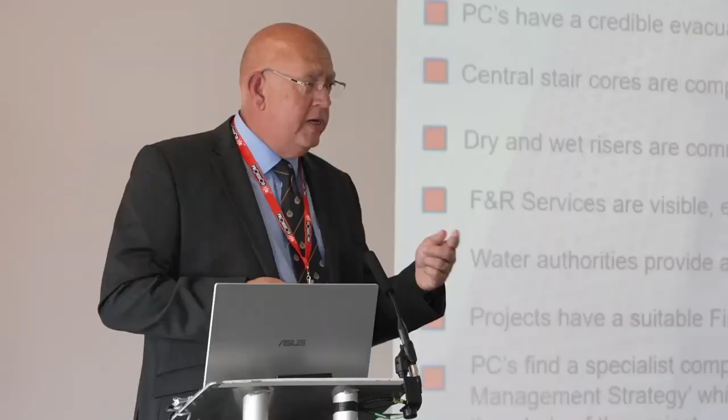We're 30 stories worth of fire hose, seems like a lot, doesn't it? Anybody wants to talk to Tom about what that looks like, the fire stopping elements we're putting in buildings. That's another sort of energy sustainable technology that sort of is great but works against us. It also burns the grass in my yard.

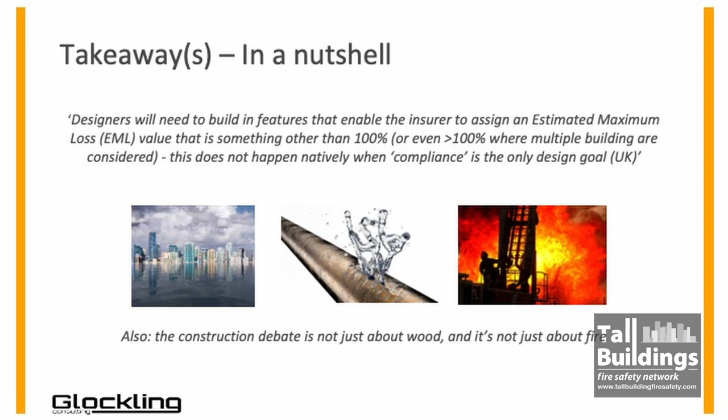Now, the key takeaway up front is that insurers use a term called EML, estimated maximum loss, and you need to know what that is and why it's important. But the other thing is that the problems of insurability are not just about the materials used. They're not just about fire, and they're not just about water. Many other things come into play. So I'll describe a little bit about this term EML, estimated maximum loss.

If every building was insured as though it was going to burn down entirely, it would be very expensive, and I'm sure insurance provision would be very difficult and punitively costly. So here we have a 17-story building. Let's assume we have a fire on one floor. Under insurance terms, the EML, we may assume we lose the fire floor to fire damage. We may crudely assume that 2 floors above might be damaged by smoke contamination. And we might assume that a floor below is subject to water damage from the firefighting activities.

So in this case, the building might be insured on the basis of an EML of 4 in 17 floors. So there's no assumption that the whole building's going to burn down. But let's have a think on what merits the building needs to produce for you to be able to hang your hat on that and stake your money on it. Actually quite a lot goes into it.

Internal fire spread has always been the domain of significant concrete floors. And now, of course, we're deviating from that. In this model, it infers that there is no external fire spread up the cladding system.

And of course, that's the domain of non-combustible systems. And you can go on and on. But an awful lot goes into that simple assumption. So what happens when things come into play that deviate from this model and start to make things difficult?

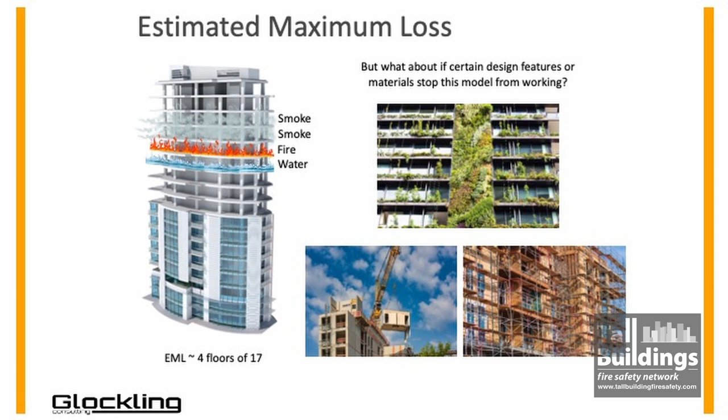Modular construction, or combustible modular construction. With every module lowered into place, there are cavities around it, voids, which have the potential to spread fire out of the domain of any suppression system, so heavily dependent on fire stopping, and obviously out of domain of the fire service as well, who are ill-equipped, understandably, to deal with fires in these hidden and dangerous locations.

And we also need to consider the periods of insurance and construction, a key one where in many construction methods, the fire-resisting surfaces, both internally and externally, are the last surfaces to be applied to the building. So here we have a period of heightened risk at the time of construction.

Now, in putting together the white paper, I wanted to find some of the limits of insurer comfort to do with buildings. And this is what I'm saying. It's not just about what you build out of. It's about a great deal more than that. And actually, we ended up with a matrix of 26 insurability features that are really as few as you can get away with to consider whether it constitutes a desirable building or not.

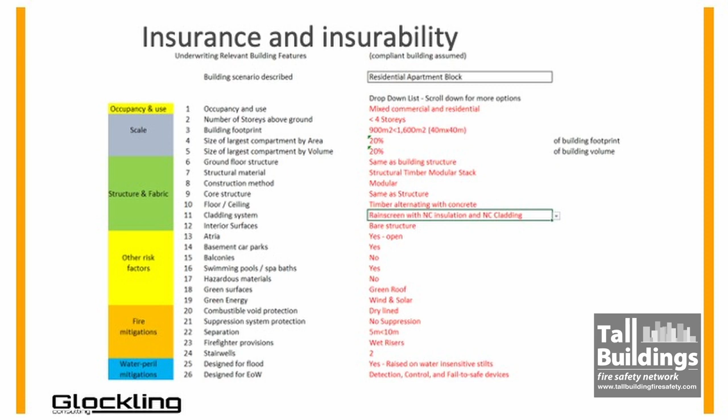So roughly split into six categories: occupation and use, pretty obviously; scale, that's a very, very large factor. The insurer appetite for large buildings versus a single occupancy can be very different because obviously that limits the ultimate scale of loss that can happen. Crucially, the fabric and the structure of the building. What materials are used? Where are they? Have they been intelligently applied? Are you using best-in-class materials where they need to be to curtail the risks at that location?

Then there are other risk factors. Now, obviously, given the audience, this might be unpopular to cite, but if you go back to maybe the Factory Mutual publication on looking at sustainability, they said any pursuit of sustainability inevitably increases risk. There's no free lunch here.

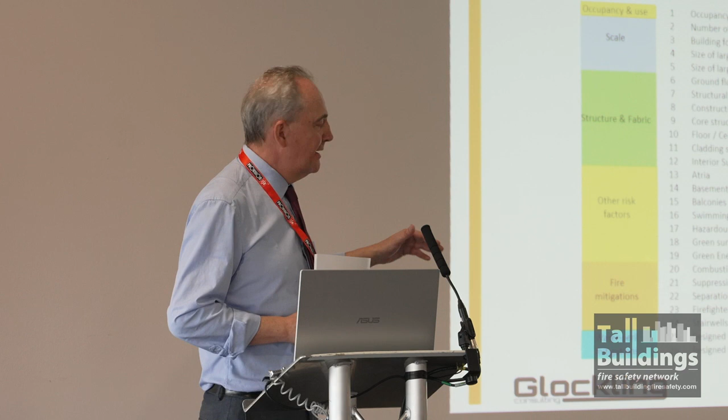And so whilst on the one side you can talk about the benefits of PV panels, wind turbines, green surfaces, they come with their own challenges, and these need to be addressed. Otherwise, it represents a big deviation from where we are. And I'd included with that things like atria, which, whilst they produce lovely spaces, an insurer may view as a breakdown of internal compartmentation, if not correctly designed.

And the two final criteria we have are the effort put in to mitigate fire, and increasingly the effort put in to mitigate water perils. Now, for many insurers, the perils to do with water in large, tall, mass timber buildings represent a greater challenge than fire. The reason for that is that fires are rare events and obviously very costly when they happen, especially if they're not controlled properly. But escape of water events happen in their thousands every single day.

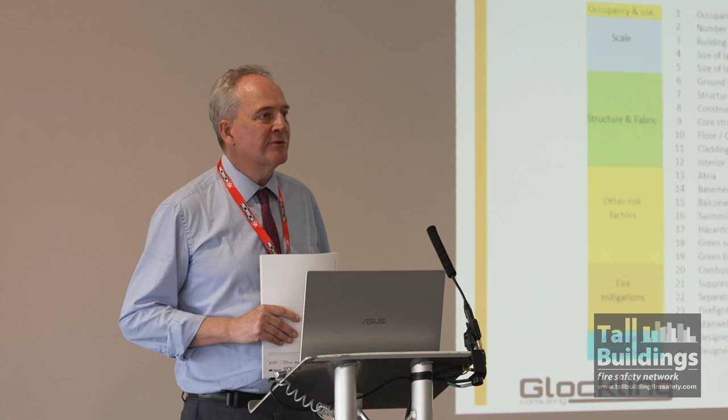Let's not forget, when you change from materials like bricks and mortar and concrete and steel, not only are they resistant to fire, they're also very resistant to water. And if you start to exchange those for materials which are more susceptible, such as timber, then that can change that. Now, in the domestic and residential environment, escape of water losses accounted for more than fire and security combined, coming on for £2 billion a year of insurance payouts. So I think you can see where the problem comes.

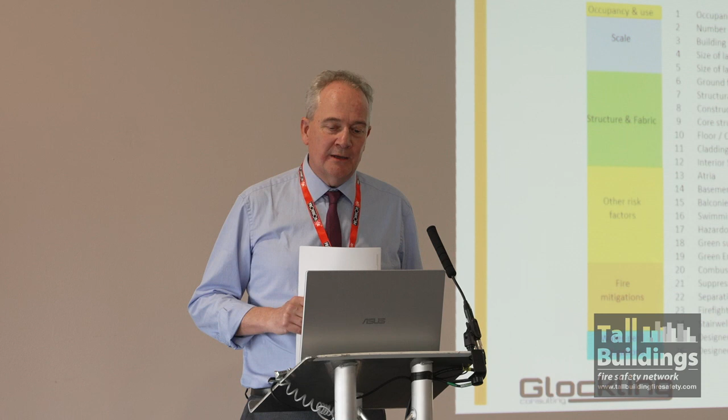And that's where we are building in quite resilient materials. Imagine now a future where we've changed to more susceptible materials and we're building at height, where any escape of water can be amplified down through the floors. And I think you can see that statistic is only going to go one way. So where does this leave us at the moment?

Now, in the UK, the provision of insurance for mass timber is incredibly difficult, to the point where many projects proposed in timber go back to the drawing board and get redesigned in concrete and steel. And it's not ideal. Insurers do not like turning down insurance propositions, but they're not stupid either. And they do need things which have half a chance of working out for them and their investors also.

So while this situation prevails, where there might be a lack of trust in a method, it leads to a lack of availability of insurance capacity. And under this situation, the insurance brokers need to work very hard.

Remember, insurance isn't a right. Insurers can place their capacity in lots of different places to seek the best returns for the least risk. But at the moment, mass timber can be a very unattractive proposition. So that leaves the broker to really scrape around 5% here, 10% there from a range of insurers. And even then, they might be reinsuring back to the reinsurers, so less sticks to them still. It's a very difficult situation, and it ends up being costly.

And as we said before, it can lead to people changing their design basic principles. If you compare that to when there's good trust and technical understanding, then there's a choice of insurers willing to provide 100% capacity, and that leads to healthy competition and low prices, and very much less reinsurance on this basis. So this is where we are at the moment.

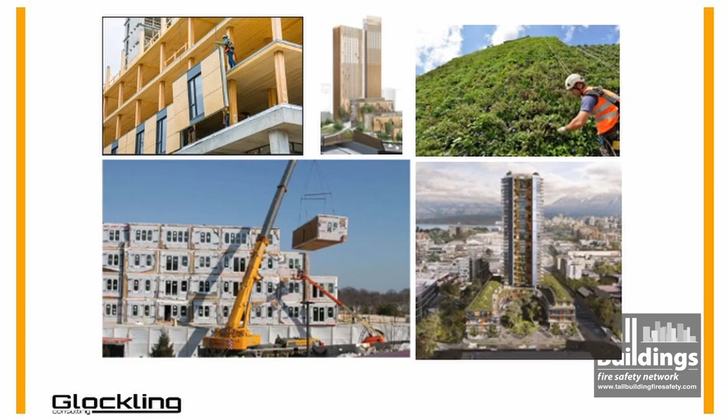But the principles of insurance can't change because they're pretty hard and fast. And they need to be totally agnostic about the benefits to the environment, because we're talking just about risk control and dealing with what we're presented with, not about the necessary stuff to, sort of, save the planet, if you like.

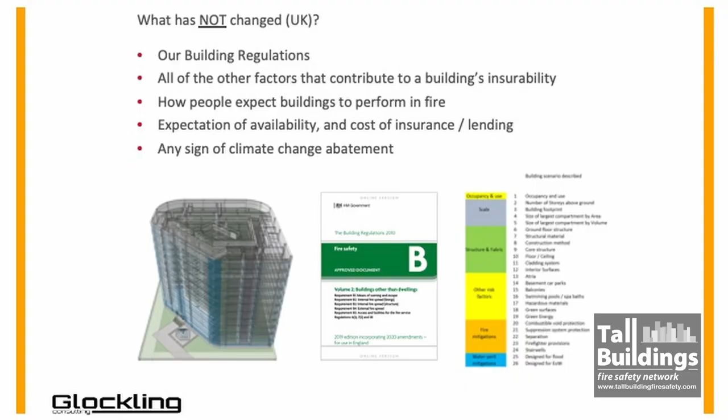But let's have a look at what really hasn't changed. The building regulations in the UK haven't really responded to the challenge set. Now, that's a very big issue for us, because we know if it's in regulation, then generally it gets done. Actually, I think we've seen from Grenfell that even when it's required by regulation, often it doesn't get done. But that's a different story.

So our regulations in the UK are about life safety. And if you want to put it very simply, that's about evacuation before collapse. After evacuation, there's very little interest in what happens to the building, but clearly there's a group of people, such as the owner of the building, the occupants of the building, and the insurer, who really want something to save afterwards and to put back to right. Not every building fire should end with the possibility of it being on the ground.

And when you compare, say, to the United States, they have addressed this in the International Building Code. So one of the key things which we'll highlight, obviously, is combustible voids. It's clearly a key area of concern. But in the International Building Code in the States, it will say if you have a combustible void, it will be filled with mineral fibre, or it will be lined with gypsum board, or it will be sprinkler protected. So in essence, by regulation, they've said that there's no such thing as a combustible void, which makes everything an awful lot easier.

And actually, when querying insurers about the palatability of different types of building using those 26 metrics, the American insurers were a lot more laid back, because they know if it's built in the States, it will be lined with gypsum board, there will be no bare wood surfaces, it will be sprinkler protected, so by and large they can treat it as a pretty ordinary building from that respect. But it's not the case for the UK.

So the other thing that hasn't changed is all the other factors that contribute to insurability. How people expect buildings to perform in fire. That's a very interesting point. Our experience of how buildings perform in fire is built out of the use of materials which perform well in fire, but were the means to achieving the life safety objective.

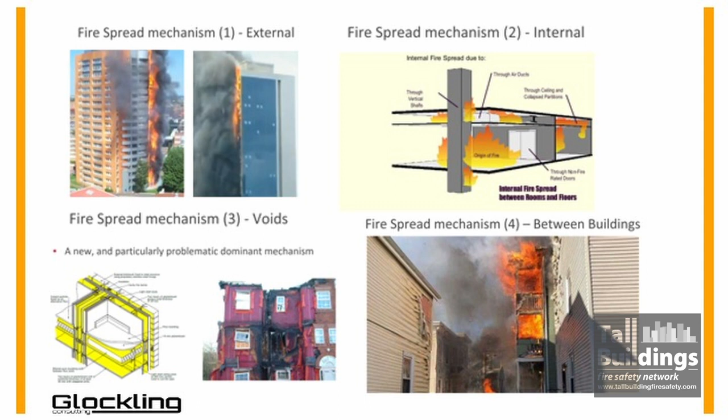So the key forms of fire spread, which are really tackled in this document and really need to be addressed at the point of design if you want to impress those who have a higher interest in the building really performing at a property protection level. Obviously external fire spread and the use of good cladding to prevent that. Prevention of fire spread through the internal occupied spaces, and our building regulations do this very well.

Now, nothing I'm saying here is a criticism of our building regulations in terms of their ability to preserve life. They do that very well, and the statistics for the UK are exemplary in comparison to other countries. But the internal fire spread is the story of really fire doors, ducts, dampers, and the like. But what we are seeing a lot more of at the moment is the introduction of voids.

So here in the bottom left-hand side there, really just as a fisherman's net could be thought of as a lot of holes sewn together with thread, really wall makeups now are becoming so lightweight. They are really a loose connection of voids connected with lightweight materials. And that makes things very problematic, and it makes designs immensely dependent on really CAD-level accuracy installation of fire stopping. And in there we see a massive challenge, particularly for the lighter weight construction methods such as light timber frame.

Of course, we also need to consider fire spread between buildings also, because it's not uncommon for EMLs, estimated maximum losses for a building, to be assigned that are over 100% if there's a fear that fire may spread to involve other buildings also. And that can be immensely problematic as well.

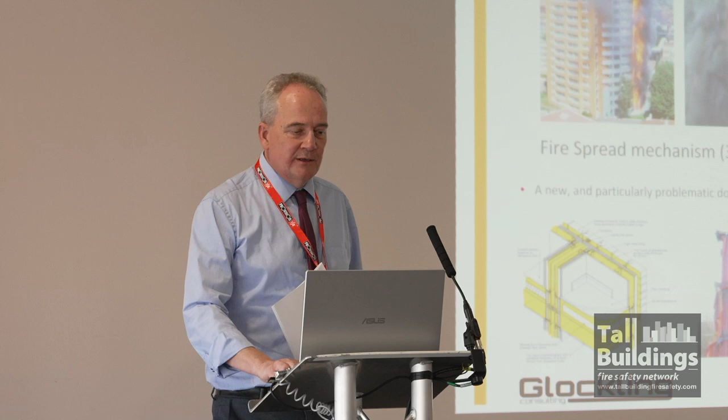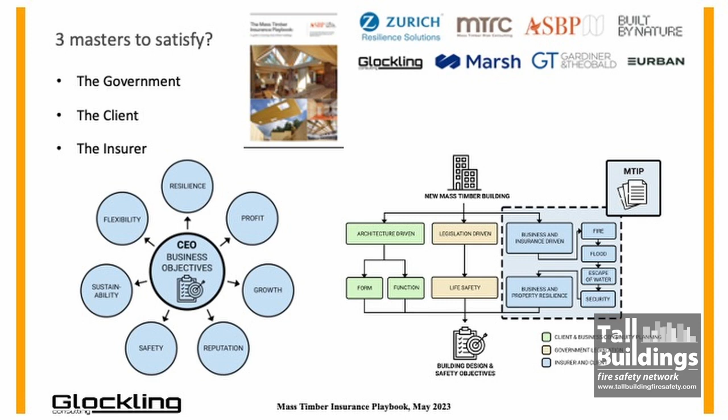So what this mass timber playbook does is it basically produces a framework to work within so that there is good communication between all involved parties so that all their requirements can feed into the design. And we were looking at the government requirements, the legislative ones, what the client wants. It's nice to deliver the building that they need to support their business continuity plan also, rather than just delivering lowest cost. And in association with that and completely aligned should be the requirements of the insurer.

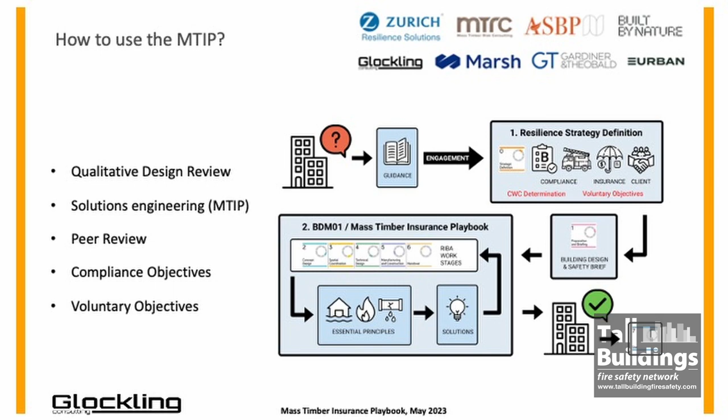So the document sets the framework, and then using the RIBA design stages, it looks to bring forward the resilient design strategy and address all of the issues using the confirmed insurer principles for the mitigation of fire, flood, escape of water, pest infestation, and rot, so that all these things get addressed at each of the RIBA design stages and mitigated and pulled through the entire design as they go through. So that at the end of the day, you end up with a building where you have minimized many of the resilience issues that building out of combustible materials can introduce into the situation.

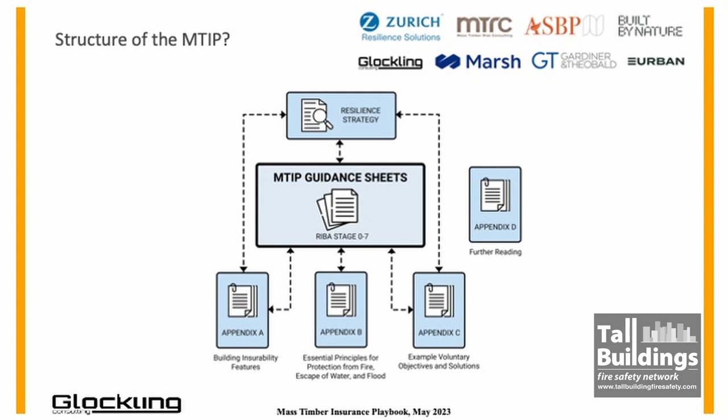This document is designed to be very simple, it's very accessible. It really centers around a number of guidance sheets, one pertinent to each of the RIBA design stages. But there are also a number of supporting appendices which really describe the building insurability features, which I mentioned. They describe the insurer's essential principles for sort of fire and water and flood mitigation.

Now, when we first showed it, there was no appendix C, which was example voluntary objectives and potential solutions, because when people read through it, they would sort of say, well, okay, what do you want us to do? Now, this isn't intended to be a prescriptive guide on what to do to get insurance. It leaves you all the freedoms to design buildings as you need to design buildings using all the tools that you have. But we have put in a few examples in the back, and I can describe a few of those as we go.

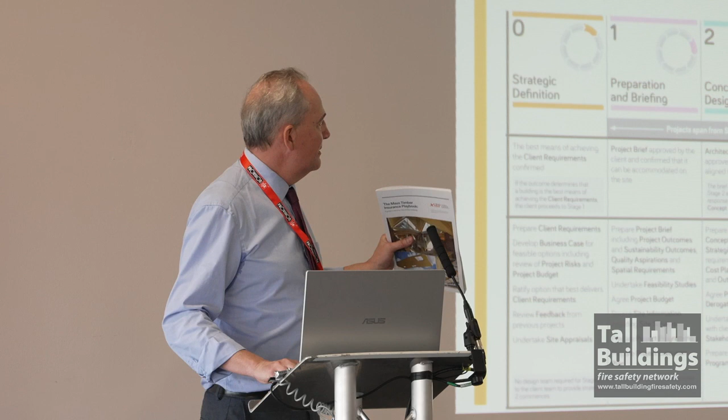So I won't go into these, but these will be very familiar to anyone in the UK, the RIBA design stages, but it shows you where all the actions get introduced and what should be addressed at each one. And through these guidance sheets in this document, it tells you what you should be doing.

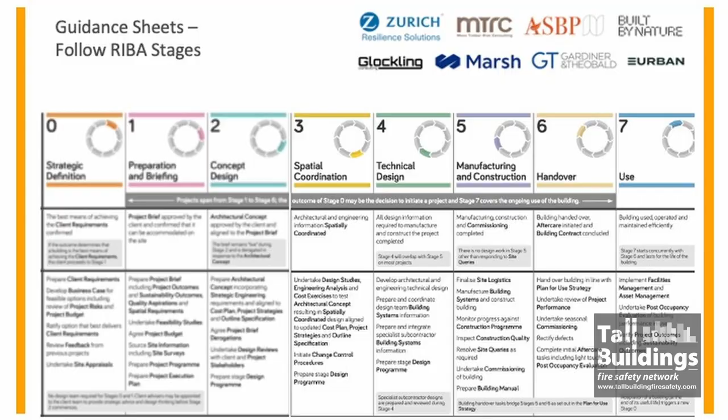So, simply put, the guide introduces sort of voluntary objectives which should align the business continuity planning of the client, insurer requirements, and knit those together with the other stakeholder interests to produce a very good remit to design to. It encourages broad and early engagement all the way through. There is a fear now that some buildings aren't getting even to the drawing board because they can't be assured of insurance at the end of it.

Remember, these things start many years in advance, and that is clearly a challenge. People do need to understand the efforts you need to go to. Everything should have a pedigree back to EML, estimated maximum loss of that building, be it the installation of water detection and isolation devices, be it the use of non-combustible cladding and insulation. Everything should have a pedigree back to that to show that when it lands in front of the insurer, they can see that some effort has gone to address their side of what's important.

Because at the moment, obviously, if a building can't get insurance, it probably doesn't get built. There are also other issues to address, which I'm sure will be well covered, on repairability. And I'm sure parts of the solutions to this are probably to do with digital systems as well. So, what the guide inevitably leads you to, where there are risks, is really the potential for hybrid designs at the end of the day. Maybe the skinny use of concrete where you need concrete, but replacing large areas of the building with timber where you can.

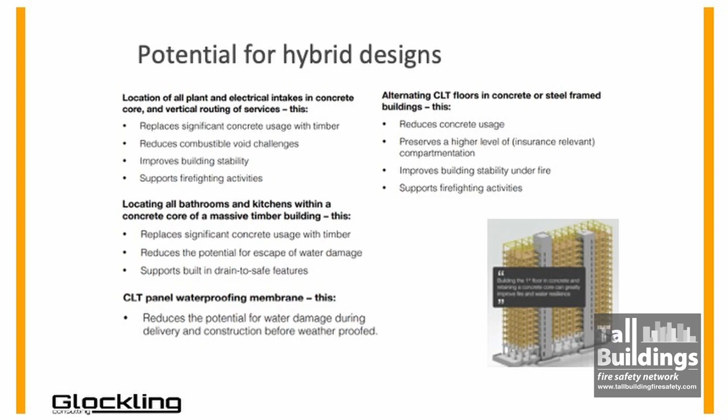So obviously building on a concrete plinth where you have underground car parks is a good idea, or where you have flood risks. I think that goes without saying. But you can extend this thought to the use of a concrete core. Concrete core can add stability, but it can do so much more. One of the most difficult questions to ask of mass timber designers is actually, when there is a fire, what ultimately puts the fire out?

It's a difficult question. You're asking people to go into an environment which is potentially unstable. Smouldering combustion is very dogged. I've sat in many experiments now where after 9 hours, CLT will smoulder through and come out as flame the other side. And if that other side happens to be a combustible void, how does it get dealt with? You're inevitably going to end up relying on the fire service. Well, the fire service have no obligation to go and save your property once everyone is evacuated.

So if you want their help, you need to design the building with them in mind. And at the moment, they're being left out of too many conversations on this. But a good starting point is to provide them confirmed structurally sound means of getting in and getting up, and then providing lots of other systems in place to support them so that they can be as effective as possible, because you are going to depend on them at the end of the day.

But you can extend it still further. Having a concrete core is a fantastic place to route the critical services vertically. So now you've removed an awful lot of the combustible voids that you might otherwise have. Take it still further, it's a place you could put in the water-bearing rooms, the kitchens and bathrooms. So if you do have escape of water events, they go down in places where the materials are insensitive to that particular challenge. These are the things that are meaningful to insurers when buildings are presented to them. And I'd encourage people to actually have a think before just presenting them with an all-timber building.